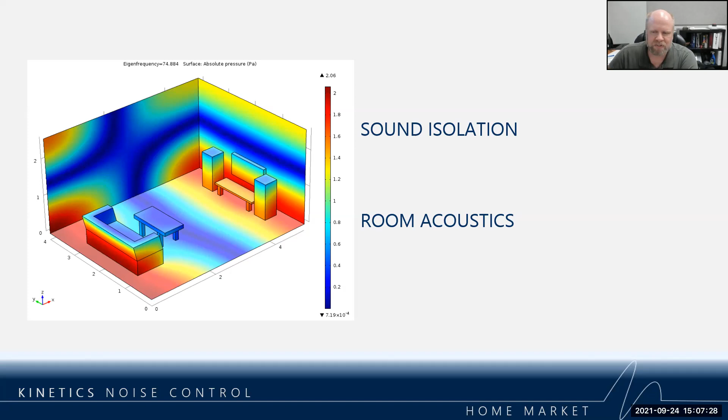As mentioned, this week we're going to try to cover the noise control, the sound isolation side of things. Next week we'll do the room acoustics, the finished goods side of things. Basically the difference is we're talking about building materials, and ultimately on the noise control side of things, something squishy - that's the technical term I'll try to use today. From the room acoustics standpoint, it's either absorption or reflection.

So we'll do a little bit of background information, talk about frequency and sound. You're probably pretty familiar with this - if you look at an oscilloscope and a sound wave, the further it is from that center line, the louder it's going to sound. And the broader the wavelength, the lower the frequency is going to be.

If we look at the spectrum of what we can hear, this full range is there up to about 25 years old. Then what happens is your eardrum starts to actually get a little bit stiffer, and these higher frequencies just don't have enough energy to make your eardrum vibrate. If your eardrum doesn't vibrate, you can't hear it. By the time you're 80 years old, you've kind of lost a lot of that high energy sound.

This is why when you see a lot of the standards, and a lot of things even for home audio, you don't see them concentrating on these higher frequencies, because frankly you can't hear them that well anyway. It's really down here where the bulk of the speakers are going to do their thing. There are super tweeters out there, but they're as much for scientific research as they are actual home theater devices.

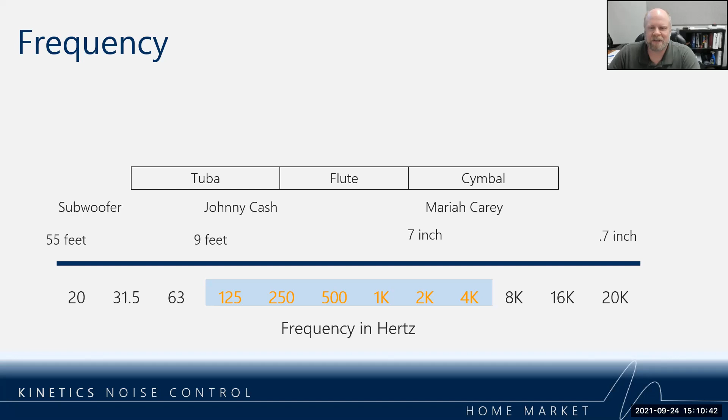So today we're going to talk about sound isolation, and Kinetics has coined the phrase 'retain the experience.' We need that from a marketing perspective. We want to make sure that not only are you paying for that escape, that theater experience, we also don't want the real world coming in and bothering you. It goes both ways, not only bothering the rest of the house, but also bothering your experience. That's what we mean by retain the experience - keep it inside the theater and keep the outside out of the theater.

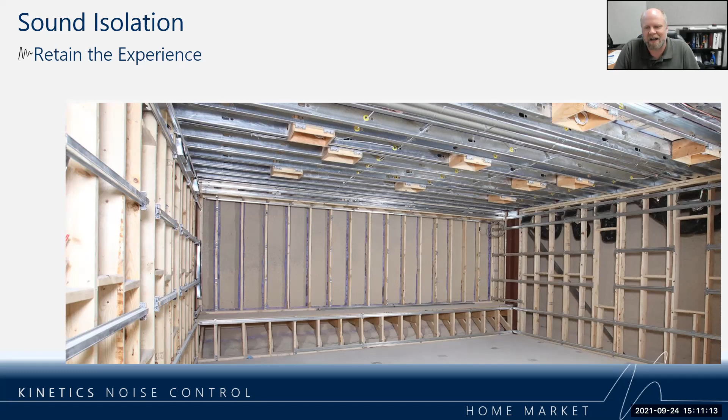If you look at the whole home, what do we mean by all that? Some of these things are going to be what you'd expect, and some maybe not so much. So incoming noise, obviously someone dragging a chair across the floor, that's pretty obvious. Someone flushes a commode, that's going to bother the experience a bit. HVAC noise might not be something you'd think of off the top. And even traffic vibration, truck and traffic, even train vibration can come in and bother you while you're listening.

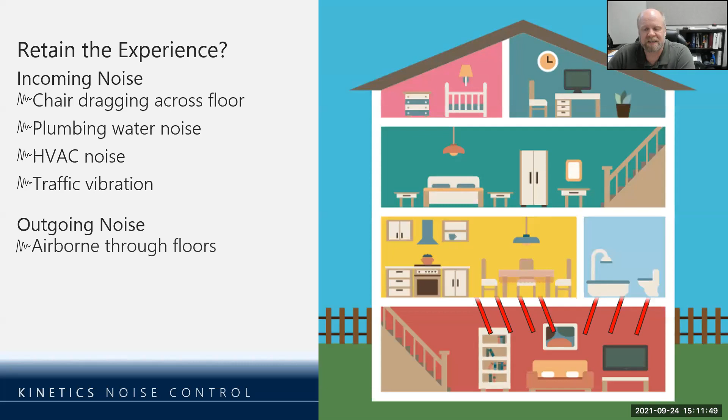At the same time, you've got noise obviously going to go through the ceiling into the floor above. It also can travel through the structure and do funny things, breaking out in funny places - we'll take a look at that. And then one nobody might think about is traveling through ducts. You certainly wouldn't want that R-rated dialogue going into the kids' room late at night.

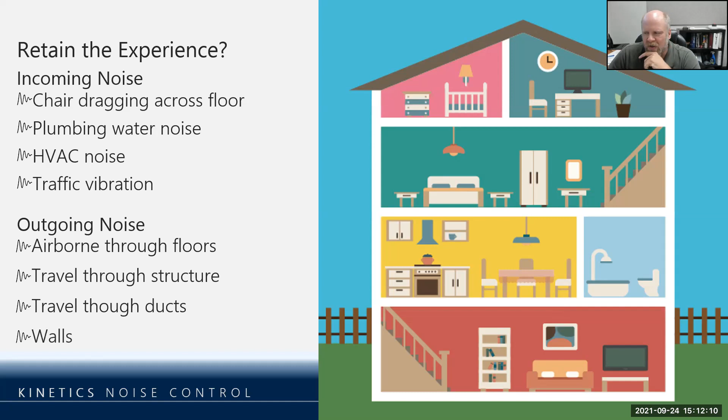Walls are a special case, we'll break those out and talk about those specifically. So the 1, 2, 3 of high performance noise control - there's a couple different ways to cut this cake up, but for high performance, we're going to break it down into 3 things.

The first being mass, and that's just mass of any kind of building material - drywall, concrete, plywood, finished flooring, all that stuff is the mass of the assembly. And basically what happens is sound goes through that mass and becomes less energy on the other side.

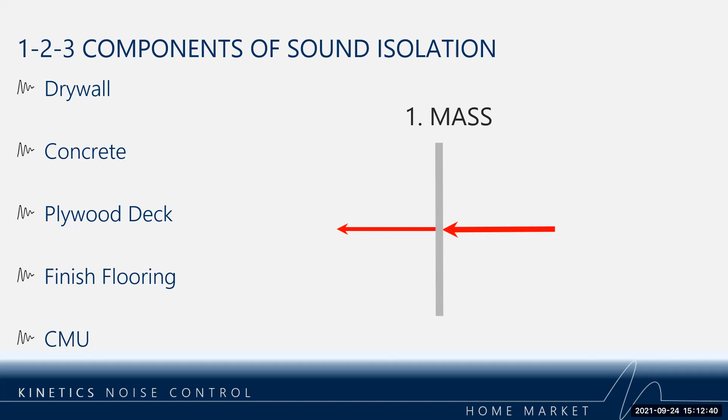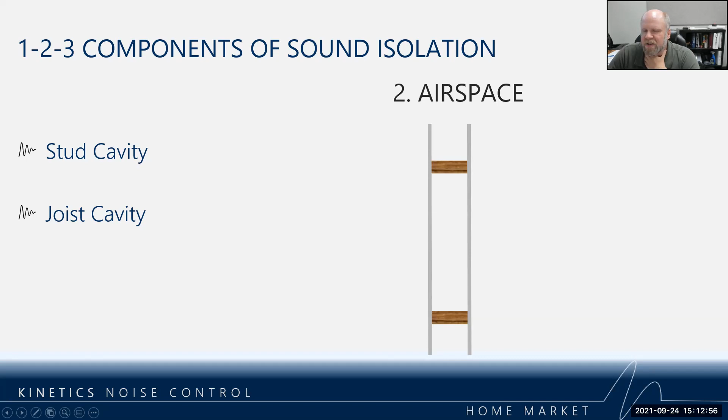The second ingredient is airspace, and people don't understand how important that is. But if we take that mass and split it in half, like over a stud cavity or a joist cavity, we can increase the performance of the noise control beyond the mass by itself. Basically, airborne noise is going to hit that first layer of drywall.

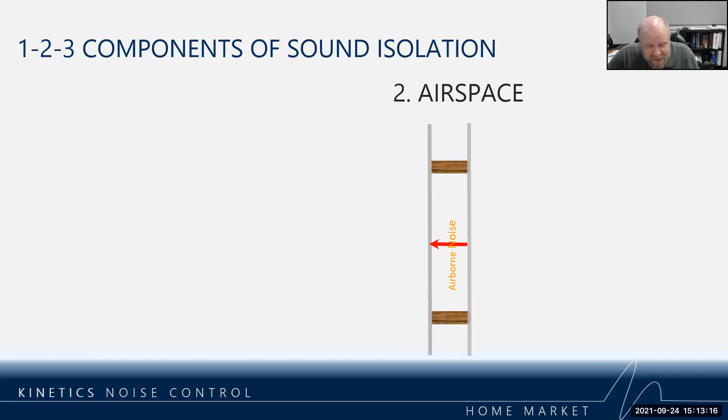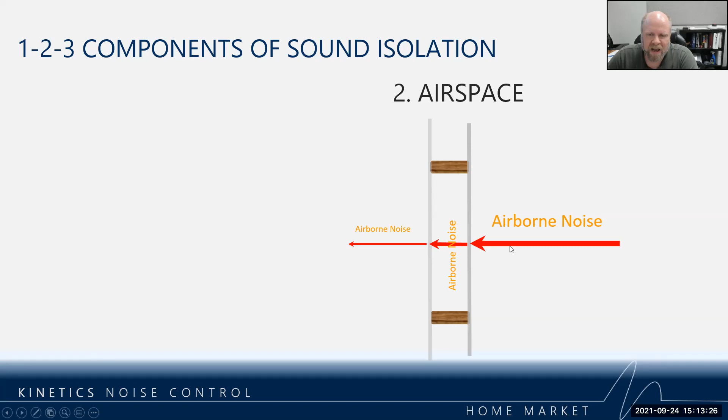It has to become structure-borne vibration to pass through to the other side. If you think about it, if there's a wall between you and me, it has to go from airborne to structure-borne. It's going to break back out as airborne, turn back into structure-borne, and then finally break out on the other side as airborne noise. Having that airspace does do some wonders for how much of that noise breaks through on the other side.

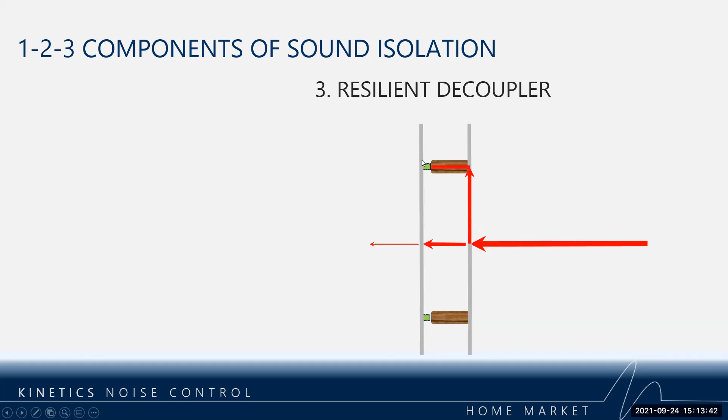The last key ingredient, though, is the resilient decoupler. Basically what we want to do is break the structure-borne vibration on one side with something squishy. Generally speaking, the squishier it is, not only does it work better, but it works to a lower frequency. So for example, a 1-inch spring isolator is going to work better than a 1/2-inch pad isolator.

When we look at the effect of how this mass, airspace, with something squishy in between works with mass, the general rule is that every time you double mass, a barrier will reduce sound by 6 decibels.

So if we look, for example, at a 6-inch concrete slab in a high-rise tower, at 500 hertz, we'll actually knock down 52 decibels of noise. If we double that to 12 inches, it's going to reduce it to 58. If we double it to 24, it will reduce it to 64.

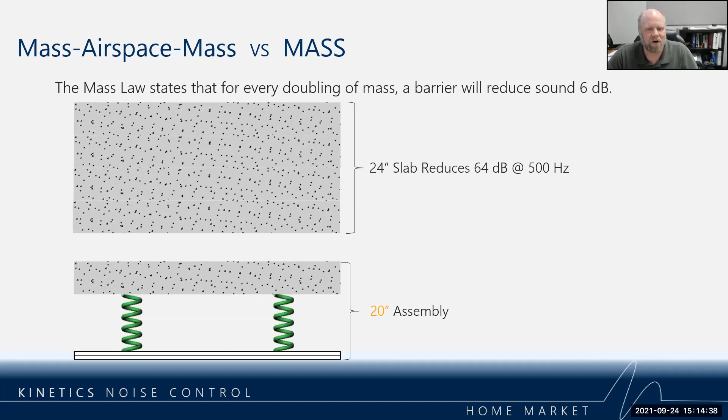But if we go back to that original 6-inch slab and add something isolated with a 1-inch spring hanger and a couple layers of drywall, this 20-inch assembly with much less concrete will actually reduce things 84 decibels. So sometimes when I'm showing off our fancy ceiling hangers with these springs, people think it's overkill. It really is about what you're trying to achieve. But for that money, you can get much, much better performance than just adding mass by itself.

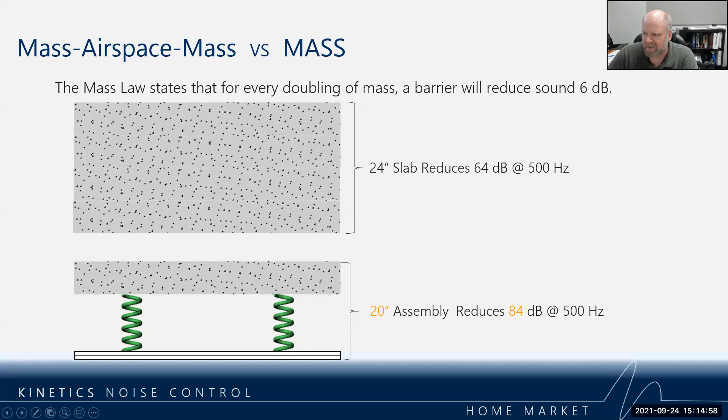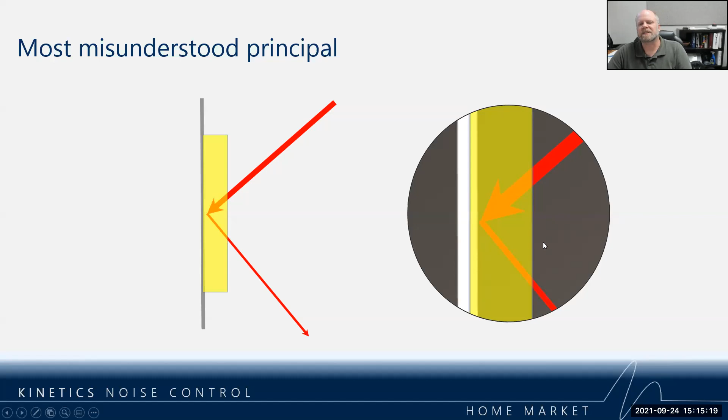The most misunderstood principle is that I'm going to put panels up to block noise. It simply doesn't really do that. What happens when you use an absorber is a lot of the energy happens when it hits that drywall and bounces back, and you get this change in mode, and that's where this energy is being transferred into heat. But that initial wave is going to basically break through that fiberglass, hit the mass, turn into structure-borne vibration, and bounce off. What panels do is basically treat anything that's reverberating inside the space. We'll talk about that more next week.

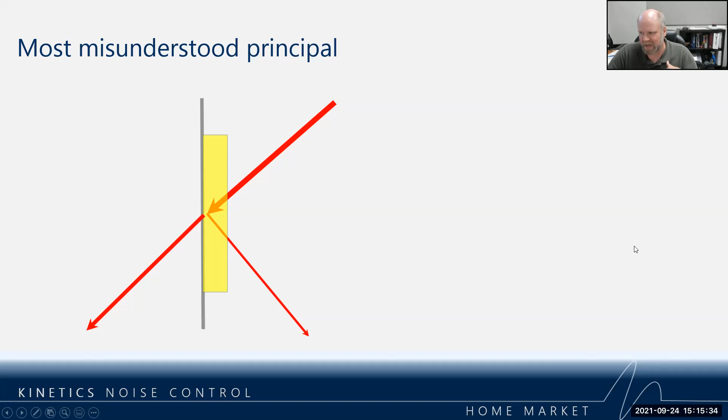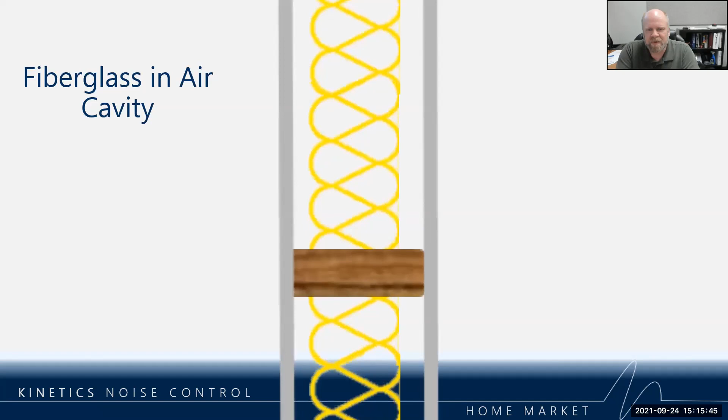That said, putting fiberglass in the air cavity does actually have advantages. If we zoom in on what's happening inside a wall, that sound energy is going to come in, and these loose fibers—you want to use a cheap fiberglass, or up in Canada, mineral wool is much more prevalent, but it's the same idea. You don't want a dense one, just a loose fiber one. Basically it's going to make that sound bounce off those fibers, and every time it's bouncing, it's losing a little bit of energy, and so forth and so on.

If we take these line segments and add them up, we've effectively made it so it takes that sound wave longer to travel through there. So we've effectively increased the airspace. This is why in the car audio world, you put fiberglass inside a bass box when you can't build a box large enough for that speaker, as the specs require. It's because you're basically tricking the air into thinking there's more space in there than it really is. Additionally, the sound is going to radiate off that hard surface and go back and forth and repeat. So that's why putting fiberglass in the cavity does help, where putting fiberglass on a wall does not.

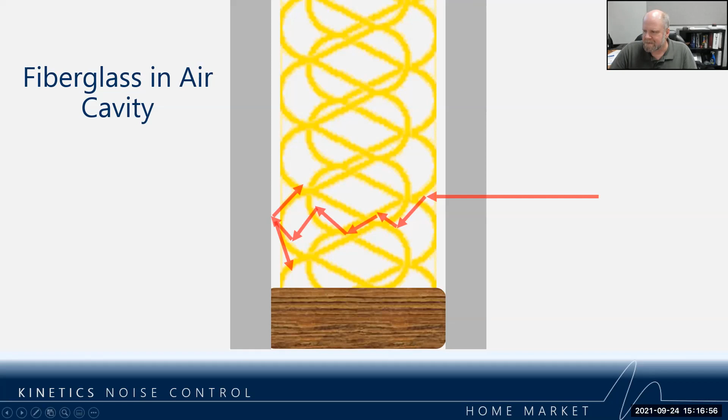Next, we'll look at some sound, and I'm going to have to turn on my audio here, so you can hear it. We're going to look at some background pink noise just as a reference. I trust everyone can hear that—if not, Scott will tell me.

Let's knock it down 3 decibels. 3 dB is about as much as you can hear a difference of. If we do 6, we call that noticeable. 10, because everything's logarithmic, is basically half. At 20, you might even have problems hearing it.

Now this is pink noise, and pink noise by definition is a collection of frequencies, so using the term decibel is appropriate. It's also probably my least favorite acoustic term, because everybody in the world knows what it means, but really when it comes down to it, they don't know what it means. And the reason is because we're way more sensitive to high frequency sounds than we are to low frequency sounds.

That's exactly what this chart is showing you—it's the threshold of what we can hear. Basically, if I played for you something at 2000 hertz, you could hear it at 3 dB, versus at 63 hertz it would have to be 35 dB, and it would sound the same level of loudness to you. A real world example of this: this is why subwoofers need those giant amps, because you've got to get that sound way up to 100 decibels, needing all that power to match the easily obtained power at, say, 2000 and 1000 hertz.

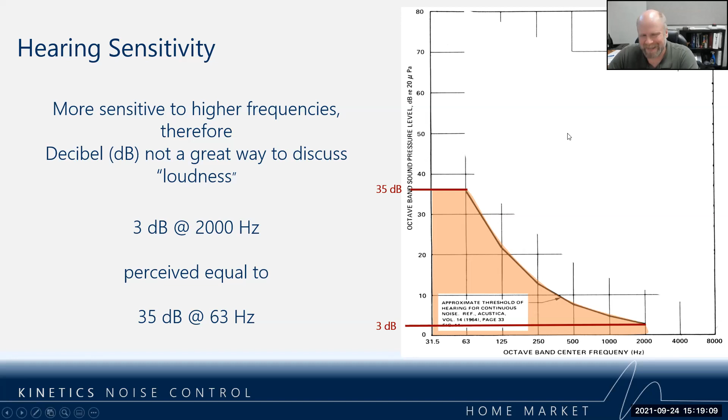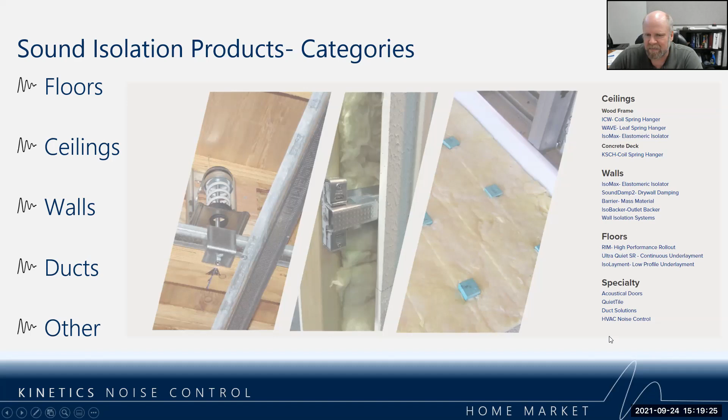Moving on to the products, this is the shot from our webpage on the noise control side of things, all these different products. Basically it breaks down into these categories: floors, ceilings, walls, ducts, and some miscellaneous items. We're going to cover the highlighted ones today. We're not going to try to go through them all.

One thing that makes a lot of sense for the Canadian market is, from a good-better-best standpoint, Watershed brings in our RIM system, which is in the best line. What makes it the best is these pads, which are actually the foundation of our company, create an airspace between the floor below and a new deck above. In this case, they're putting down a sheet of plywood and they're going to pour concrete on it.

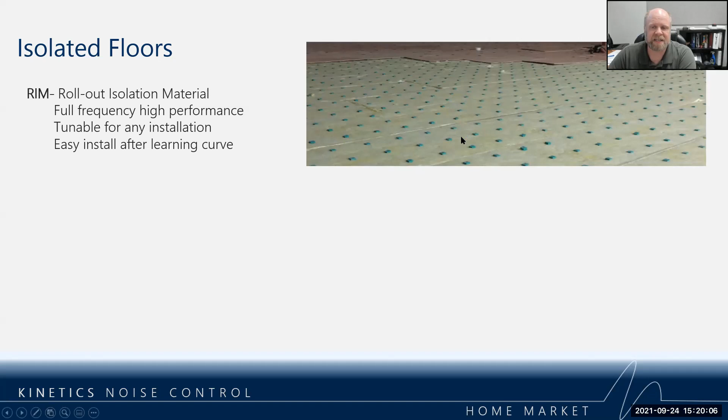What this pad really lets us do, between the type of pad we use and the spacing, is dictate that performance. To go down a rabbit hole without going too far, this shows you something very important about this system: it has a very, very low natural frequency across a long load range. What does that mean to you?

If you use this product even on grade or in the bottom of a basement, it's going to help prevent that subwoofer getting into the structure of the house. It's going to help truck traffic driving by from breaking into the theater, because it isolates very, very low down. The subwoofer cuts off at about 20 hertz; we can isolate down to say 8 hertz if we balance it right. So a very, very good system for floors.

It's the foundation of everything. If you do it right with the pads, you can build the whole system on top of that. It's that room-within-a-room concept, something to keep in mind. We'll look at that in a little bit, but really good. Makes sense to bring that across the border because it ships easier than the other products, which are board products. Between the 1 inch and the 2 inch, we can really dial in that performance to wherever we need to go.

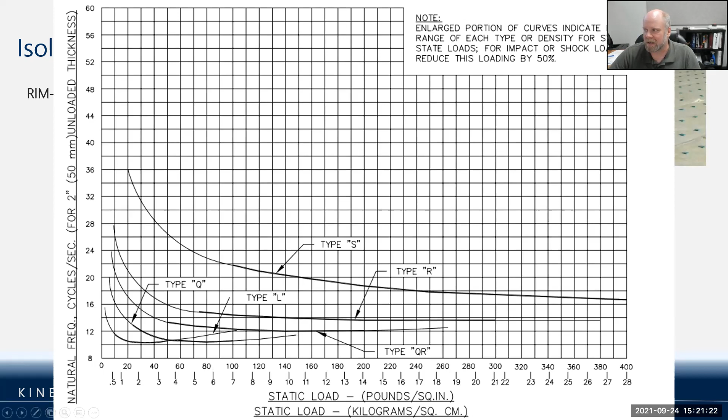That said, with the ceiling, there are a couple different options, keeping in mind that the lower or more squishy it is, the better it's going to perform. Our best one would be a 1 inch deflection spring hanger, our ICW. You see it on a wood joist—think of it like coil shocks on your car. That full 1 inch deflection means it's going to isolate all the way down to 3 hertz.

So it's going to do a really good job not only of capturing the theater sound, but also of preventing high heel noise walking across from breaking into the theater space. It is a higher priced object.

If you need to move the next step down, the wave hanger—if this is a coil shock on your car, this is a leaf spring on your truck. We're looking at a 1 inch deflection versus a 1/2 inch deflection. The performance is pretty good, it does go down to 5 hertz. Doesn't quite attenuate as much as the spring hanger, but there's also a big budget difference.

Last but not least is our Isomax clip as a ceiling isolator. Not the best performance in the world, because the joist creates a big airspace for 12 inches, and this just isn't very, quote unquote, squishy—it's a bit of a rubber pad. Definitely better than nothing, and this works wonders in walls, as we'll see, where you don't have as much airspace.

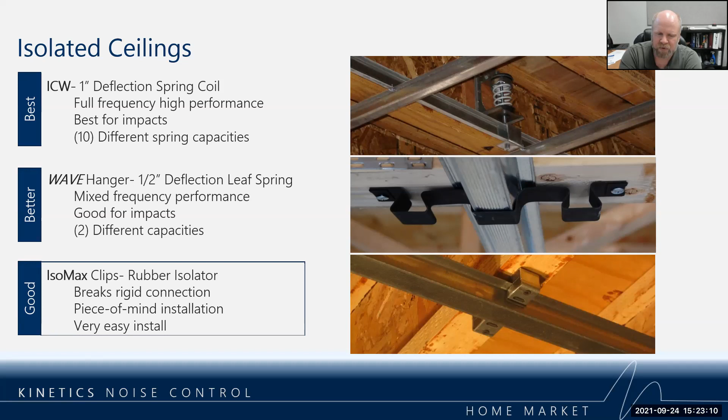Anytime you're building anything isolated, be it a ceiling or a floor, you have to pay attention to some of the tricks of the trade when installing these things. Number one, we're basically trying to isolate, in this case, the drywall with this ceiling hanger.

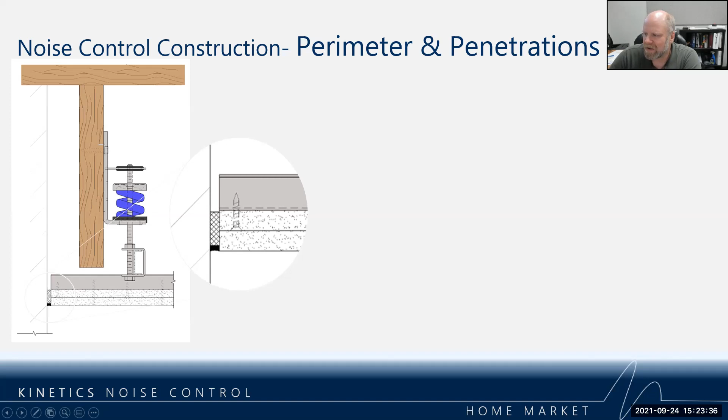We want to make sure that drywall doesn't touch the deck or the sidewalls at all. Here you see what we call a resilient interface going there, and then we finish that off with an acoustic sealant.

Same kind of idea with the floor. You want to make sure if you're isolating the concrete or wood floor that it's not touching the walls, so that thing remains completely isolated.

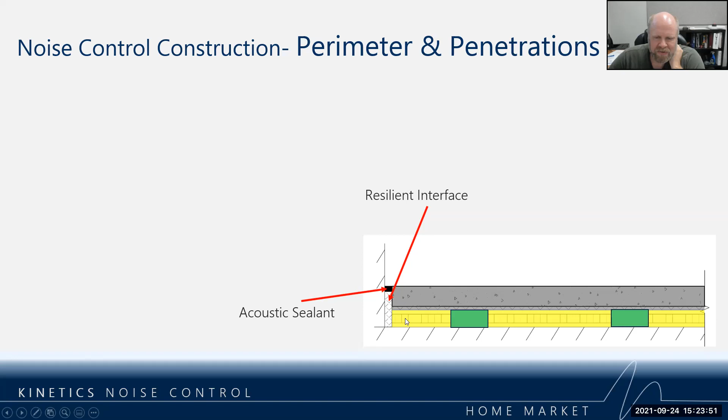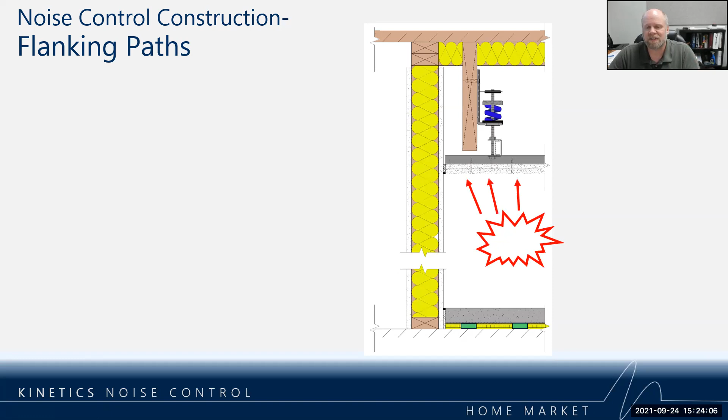Additionally, if you're building a system, you want to make sure the sound cannot flank around these nice systems you're putting in. So in this case, if we have a noise source, the ceiling is doing a good job of preventing that noise, and the wall or floor is doing a good job of preventing that noise, but the sound can get right into that wall and flank around it both top and bottom.

So again, with the rim system, build your wall on top of there and you'll take care of that problem. Then we'll talk about some treatments you can do up here.

Interestingly enough, when you talk about the commercial building code, there is no requirement for treating flanking paths in the United States, but Canada is well ahead of us. In their building code for residential construction, you have to not only use sound abatement treatments, but also control flanking paths as well.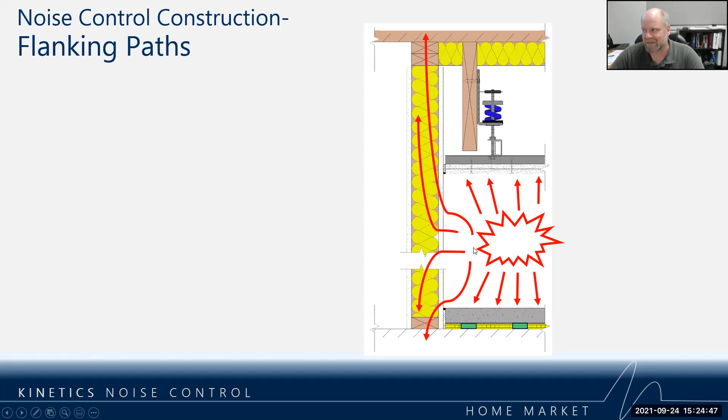So let's take a look at walls and do a scenario with the child that's going off to college, and you want to create a little media room in the basement. You're going to move some furniture around, put a wall in place, and put your isolated ceiling in and your isolated floor in.

And now you've got your noise source. We've treated the top, we've treated the bottom, but we're kind of getting into the walls. So what I'm going to illustrate with a couple different product examples is treating for noise versus treating for structure-borne vibration. Right now we've got a structure-borne vibration path going into the structure here as well as into this wall and breaking out that way.

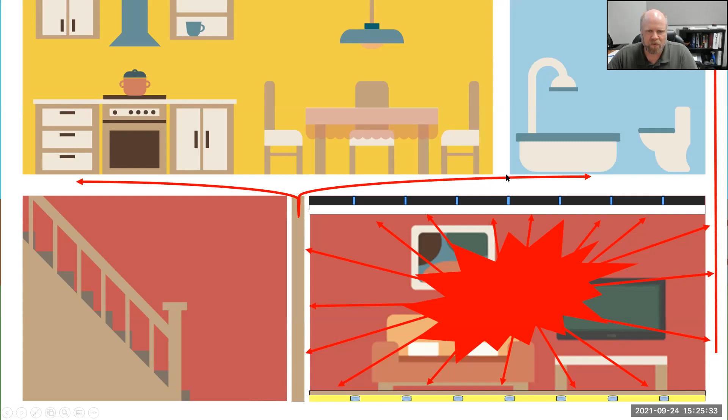So in scenario one, we're going to look at creating a wall right here on the side. We put up what's called a sway brace and build a false wall on top of the floor, making sure it does not have contact up top. When we look at how this performs, we've broken it there.

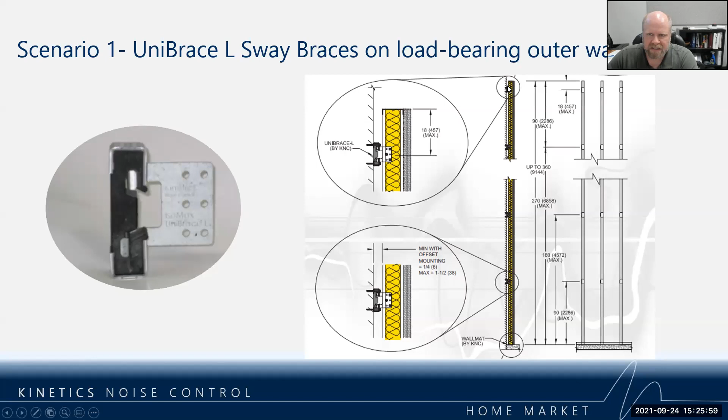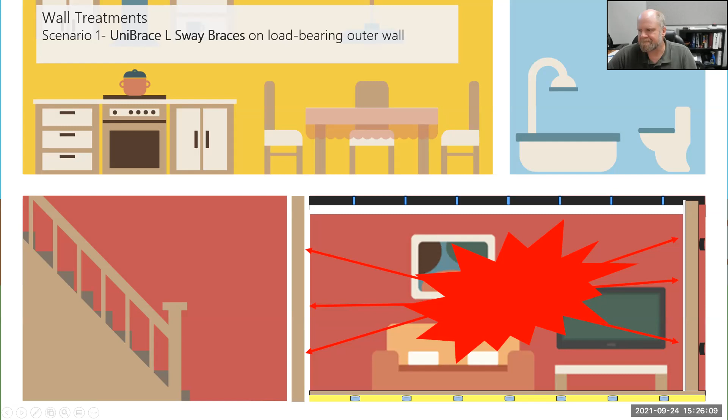This is the particular product. It holds the wall off of it, and you've controlled any vibration from going through to that wall on this side. On the other side, though, we still have this problem, and this is already built.

So what we want to do now is control it top and bottom by making a break there and adding a pad, as well as doing it on the floor and adding a pad on the bottom of the wall. This happens to be our CWCA product, as well as our wall mat.

So basically what we're trying to do is create a break. These products don't make these walls quieter. They just make a transmission path break where that structure-borne vibration can't go from that stud into the structure below or up into the structure above.

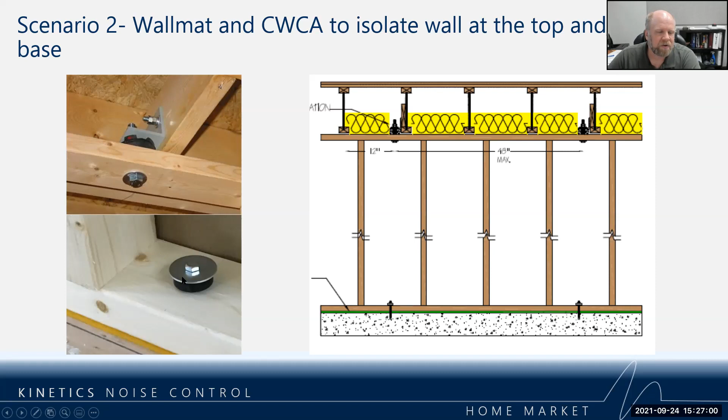And of course, if you're going to have a fastener to fasten your wall down, you better isolate that fastener too, and that's what you're seeing there. That happens to be our KAI isolator. So that's kind of scenario two — we have a stud wall here, and we have an isolated wall here.

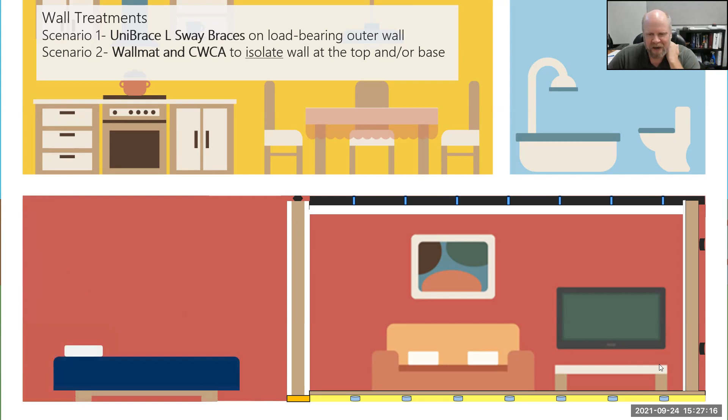Well, of course, the person comes home from college, moves back in, and now we've got a noise problem because we haven't really treated that wall for noise. We've just stopped the noise from going up and down.

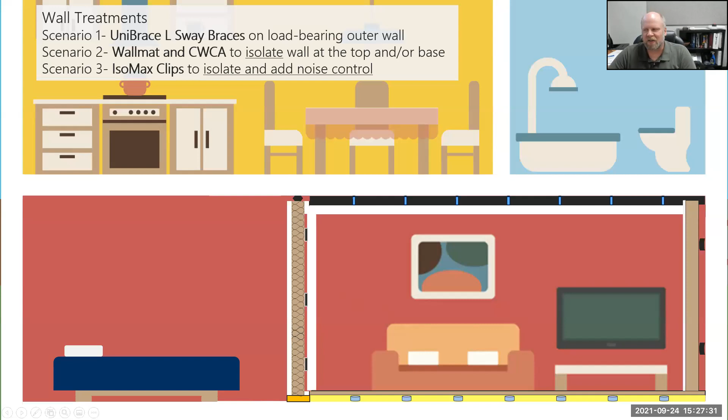In that case, we actually want to isolate the drywall with a product that will do both noise control and vibration control. And here you can see we've completely stopped both the noise and the vibration.

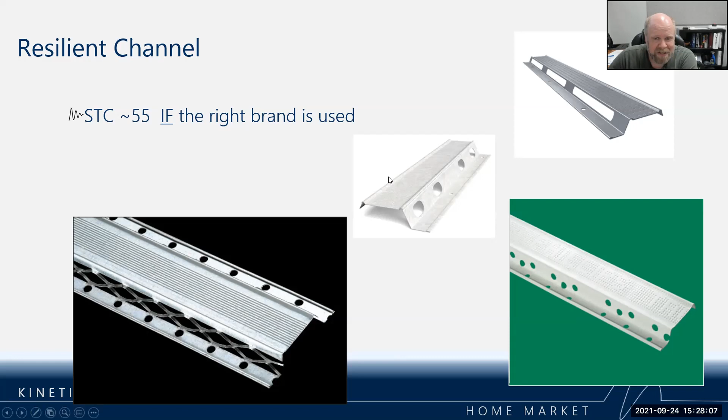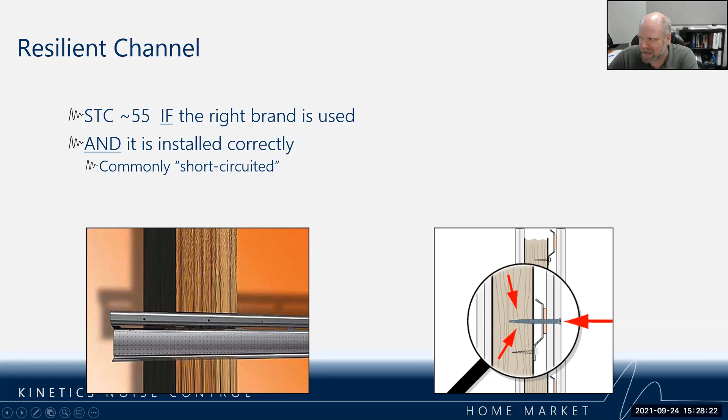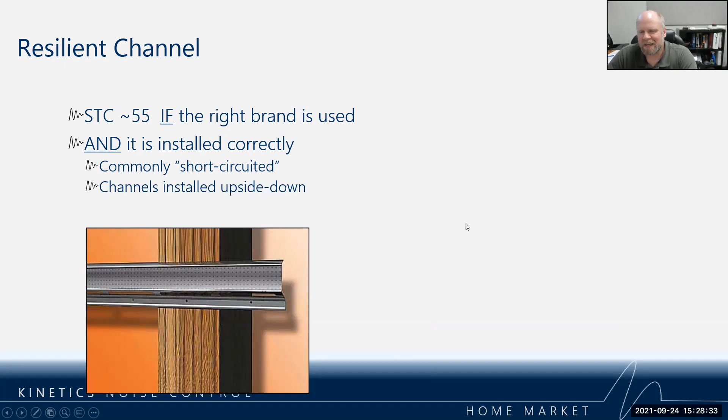Also, you have to make sure you install it correctly. It's really easy to accidentally use the wrong screw and connect the drywall through the resilient channel into a stud. The other problem is half the contractors don't understand it has to fall away from the wall in this case, not push into the wall. They estimate at least 50% of all installations are installed upside down, and it only takes 6 errant screws to make the wall completely worthless.

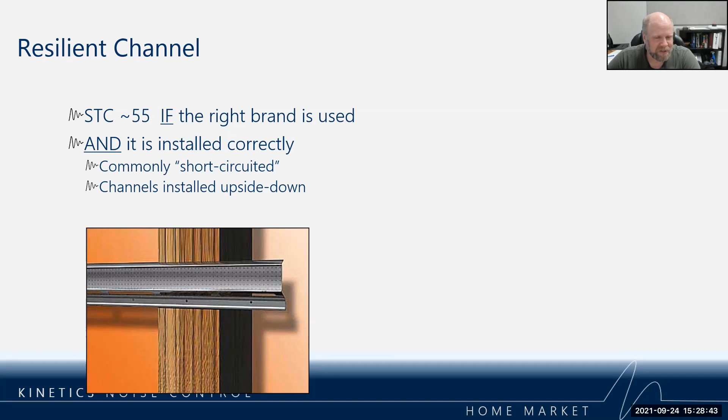That's why a much better product is the IsoMax clip that we looked at for the ceiling. Basically, it gives you the same noise control performance as a double stud wall used between, say, two apartments, in a more compact package. And you cannot mess it up as long as you spec the right screw length.

So it performs better than resilient channel, it's much easier to install, and it's actually less expensive to build this wall than it is this wall. It also saves you 3 inches of space. It does very, very well—dollar for dollar, the best bang for the buck product we have. On the commercial side, if an architect only has 30 seconds to talk to me, I talk about the IsoMax clip.

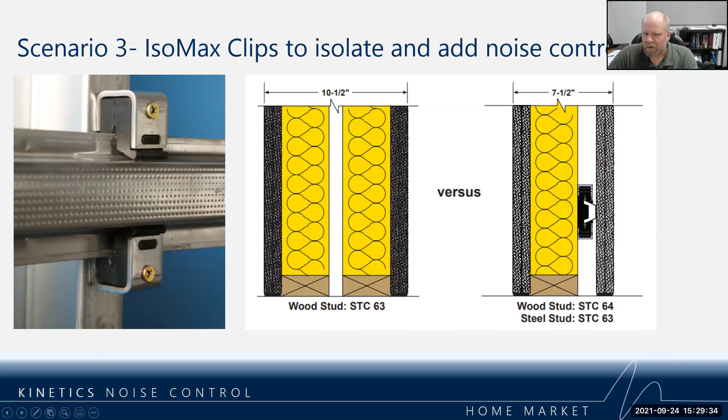We talked about the first most misunderstood principle in noise control being using fiberglass panels to block noise. The second most misunderstood is not understanding how airspace is a function of this.

If we look at a common wall, it has what we call an STC rating—a sound transmission class rating of 33. That's very bad. If I was talking at a normal volume, you would be able to hear everything I say on the other side of that wall.

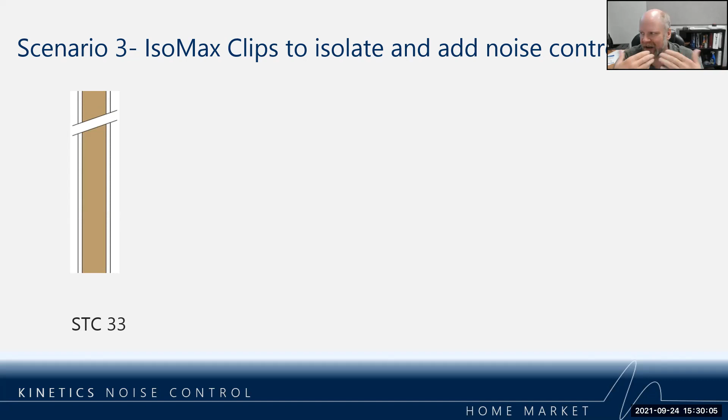If we come up to that existing wall and put an IsoMax clip right on there and add another layer of drywall, we can go from a 33 to a 46, which is a very good improvement with just 3 layers of drywall. However, a 46 is not that good.

If I was talking or yelling on my wall, you would definitely hear it, and if I was playing music, you would hear it. If, however, we use the same ingredients—these 3 layers of drywall—but put an airspace all the way from here to this layer of drywall, we actually get a 61.

So this is kind of my cautionary tale when talking to people about acoustics: if they claim to have a miracle product, they don't. It's always going to be the assembly. It's about mass, it's about airspace, and then it's about squishiness, making sure you understand how that entire assembly works. That's the guide for high performance noise control.

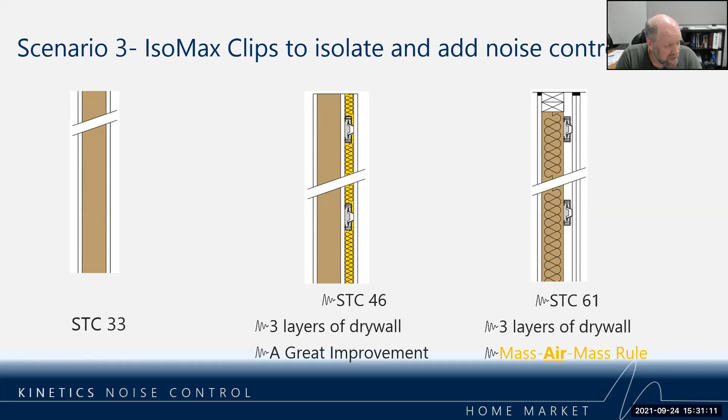You may have heard of products on the market like Green Glue. We offer a version called Sound Amp 2 of the same thing. This product works very differently than the mass-airspace-mass approach. What it does is shift the natural frequency of the wall materials. My best way to explain that is if you ring a dinner bell and then put your finger on the bell, it goes clunk instead of ding. That's kind of what this damping material is doing—shifting it to where we're not as sensitive to it because it's a lower frequency.

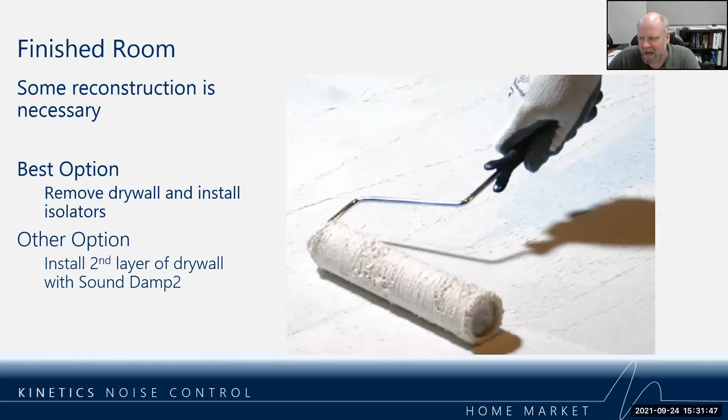It can work. However, what people don't understand is your studs have to be spaced at 24 inches on center—they can't be at 16. And that's usually a downside, because obviously 16 inches is much more common than 24.

You need the mass of those layers of drywall between those studs for it to work. So if someone calls me up and finds this product and asks if they should use it instead of a clip, I'll ask them if it's 16 or 24 inches on center. If they say 16, I say just put another layer of drywall up. If they say 24, I say definitely use the damping compound. It will make a difference.

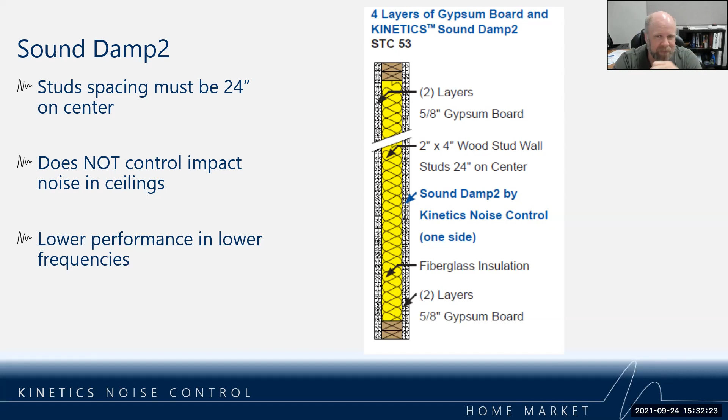So kind of bringing it together, with a room within a room you want to make sure there's no hard connections. It is all about planning. I know that can be a challenge in the home theater world because a lot of times some of these things will already be built.

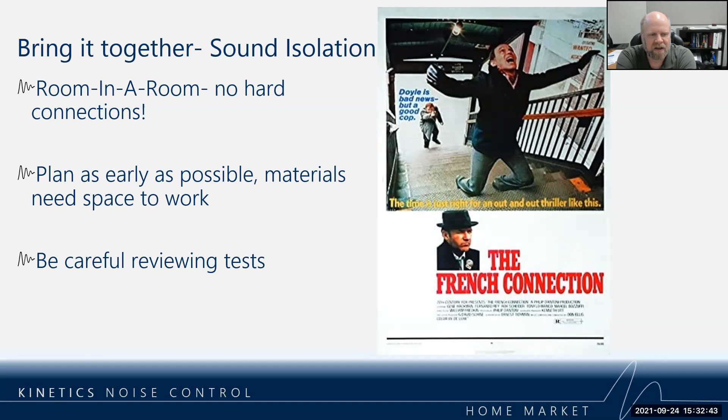So obviously the better you can get in there early, the better it's going to be. Let's take a look - I don't know if anybody's heard of the PAC clip. They compared their version, the RSIC-1 clip, to our version, the wave hanger, and they said they're a point better for airborne noise and a point better for impact noise. But if you break down and look at this construction, you can see how this game is played a little bit. So if we compare their construction versus ours, they used a Pergo system.

We used engineered hardwood floor, so technically we have a bit more mass - this system is probably a little better from a noise control standpoint. They built that flooring on, in our case, a 3 millimeter layer of rubber. They used a 2 millimeter layer of rubber. 3 millimeter should be a little squishier, so far this assembly should actually be better.

However, here's where we used a single layer of 3/4 inch plywood. They used 2 layers of 5/8 inch with a membrane in between. Much more mass, much better system for noise control than just a single layer of 3/4.

The one that really throws people off, though, is the fact that their joist was at 16 inches on center and ours is at 24. That might not make sense from a mass standpoint, but from a stiffness standpoint, this system is much more stiff. So any kind of noise control from an impact standpoint, it's kind of comparing a snare drum versus a bass drum. That snare drum being tight is going to reflect that energy much more than the bass drum. It's a giant advantage to be at 16 versus 24.

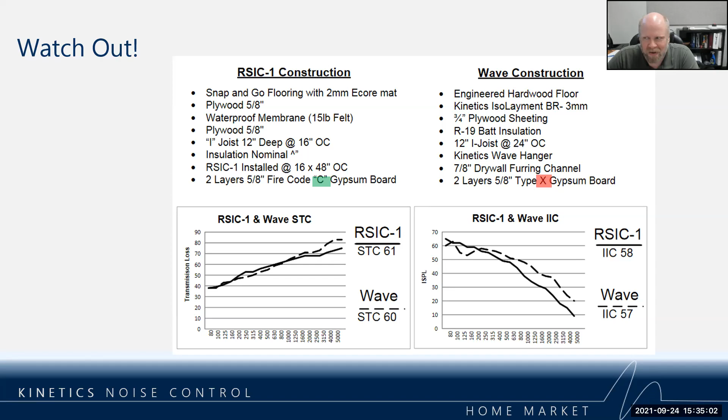So that kind of takes care of floor, ceilings, and walls. We'll look now at ducts. This has been a very much in-demand product for us. We show these things off at CEDIA, it always gets a lot of attention, and then we wind up with a lot of activity afterwards. Unfortunately, I can't do the demo for you, but it is a remarkable demo of how well our products can perform.

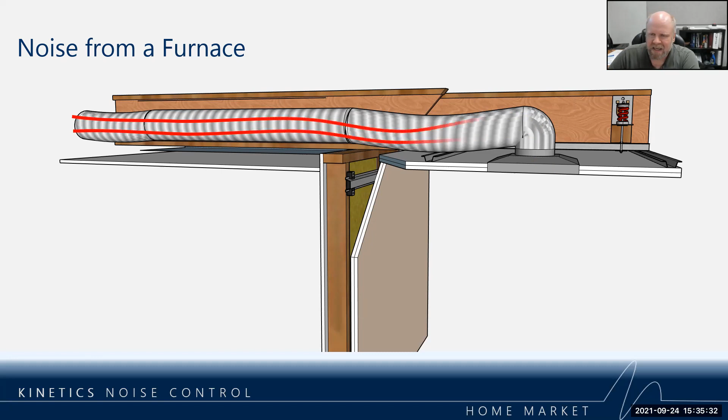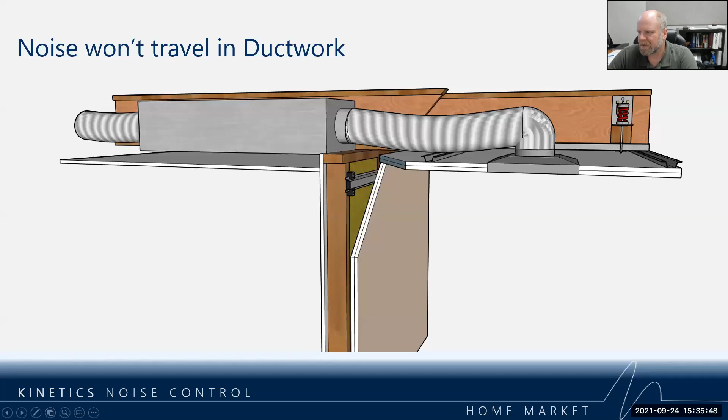In a situation, you have 2 things going on here. One, you have noise from a furnace that's going to break into the room and bother the experience. And then, as mentioned earlier, you might have that rated R soundtrack going out of the theater and breaking out into the rest of the house. And this is where, right outside that theater wall, you want to put in a duct silencer, which will treat both noise going in as well as noise going out quite effectively.

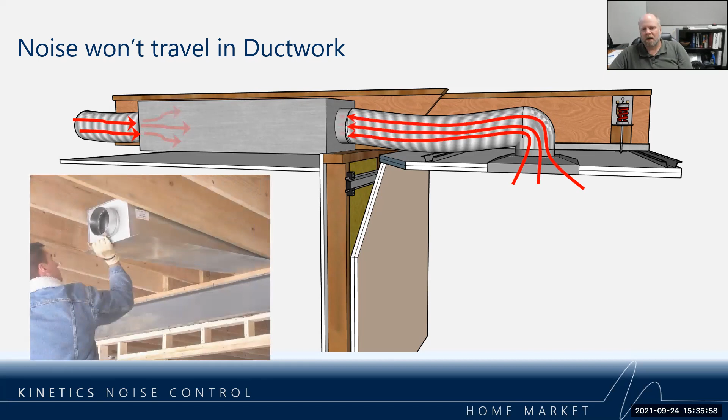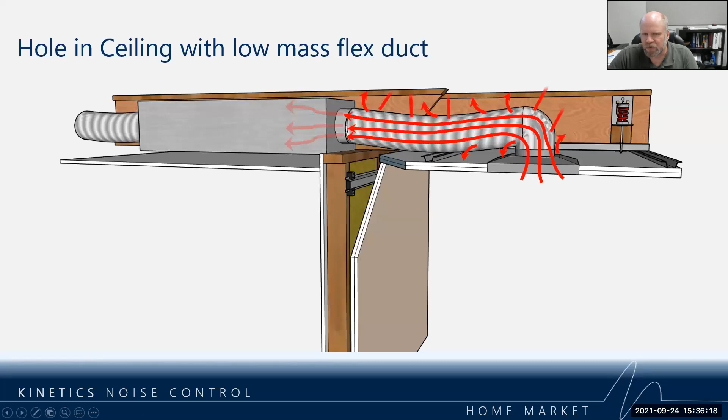The problem in this scenario, though, is you've cut a hole in your mass system for your ceiling, and that sound now goes up and breaks out of this low mass ductwork and gets into the cavity and breaks into the area above. That's where you want to treat it with a mass wrap system - a 1 pound per square foot barrier system. You do want to have a fiberglass pad on top so you prevent direct contact between the duct and the wrap. When you do that, you've now treated that whole space and the sound is completely treated. You've taken care of that hole in the ceiling.

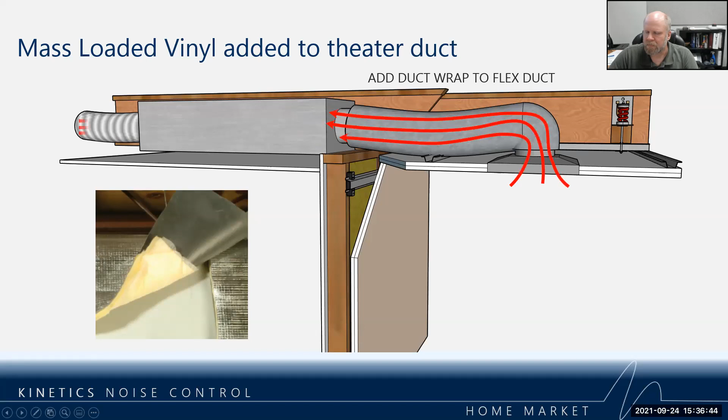Another area is kind of weak links. One, can lights in the system. You're putting a hole in the mass, so you want to replace it with mass speaker boxes or light boxes around that box. You just want to make sure that when you spec a light out, you spec one that can take the heat of being sealed like that. Additionally, anytime you have a light switch or an outlet, you want to make sure you're coating the back of it with that mass, because you've removed that drywall mass from that system.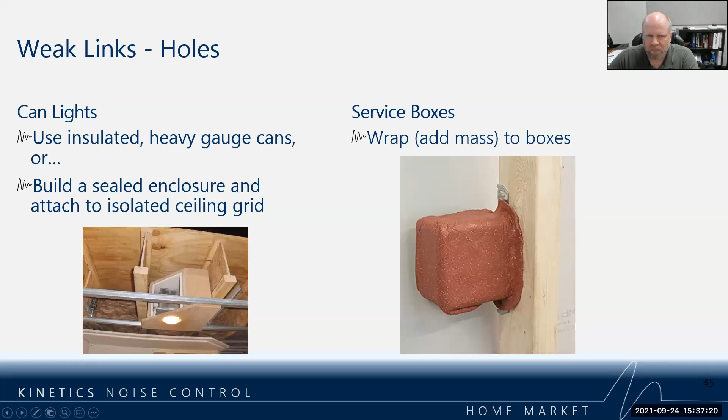Doors - we actually do sell full-size doors, but at the very least, they do make sweeps that when you close the door, they come down and prevent that noise from going under the door frame.

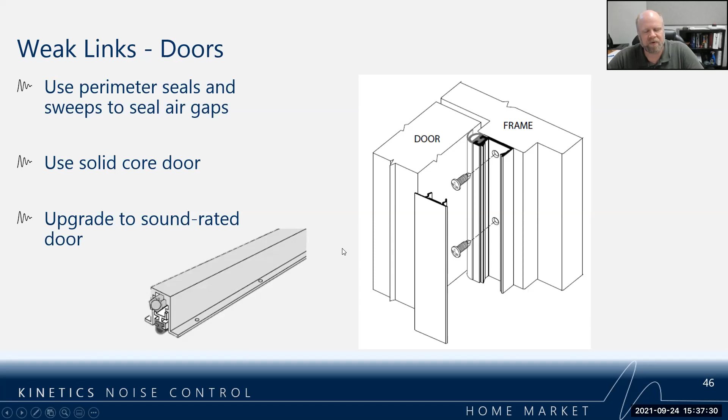Additionally, you guys can sell into any part of the home, and we are a one-stop shop. So things like using our unibraces to isolate garage door openers is definitely available to you.

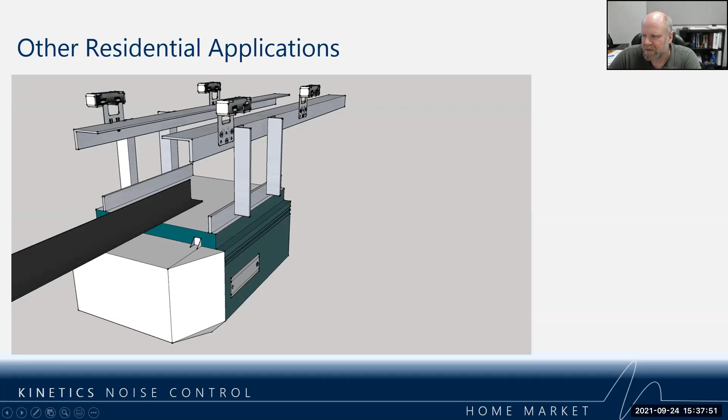Getting into fans and attics, that's definitely a source of structure-borne vibration that not many people think about. The idea is basically, call Watershed, they'll get with us. If it's a wine cellar that's a vibration problem, we've solved that kind of thing. It doesn't have to be anything, just the home theater - we can help with anything. Maybe it's a nursery room when they're building. With the home office craze now, that's something to keep in mind.

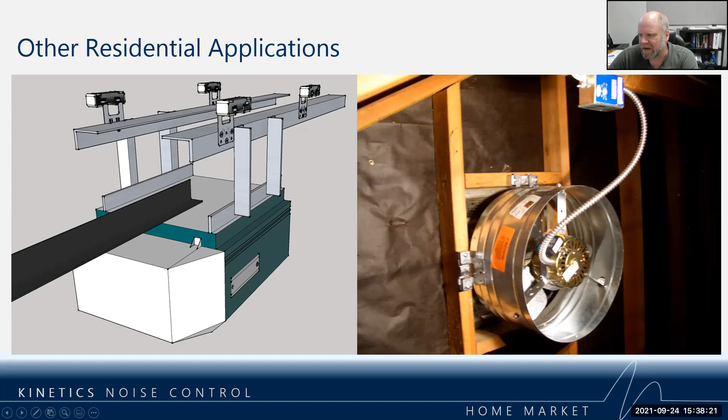And in fact, that's kind of where we begin to wrap everything up here and go back to our main model where we talked about chair dragging and plumbing noise.

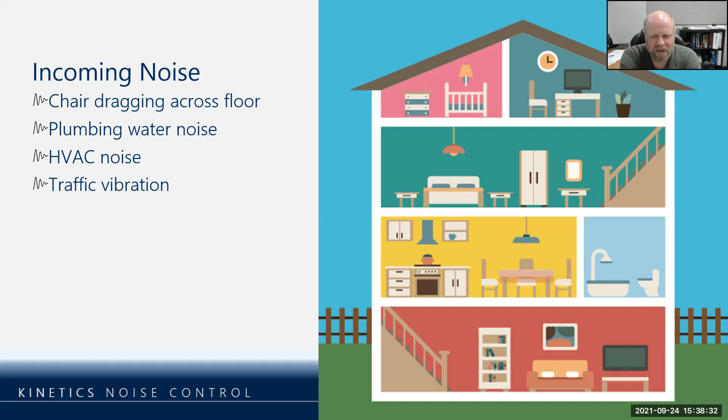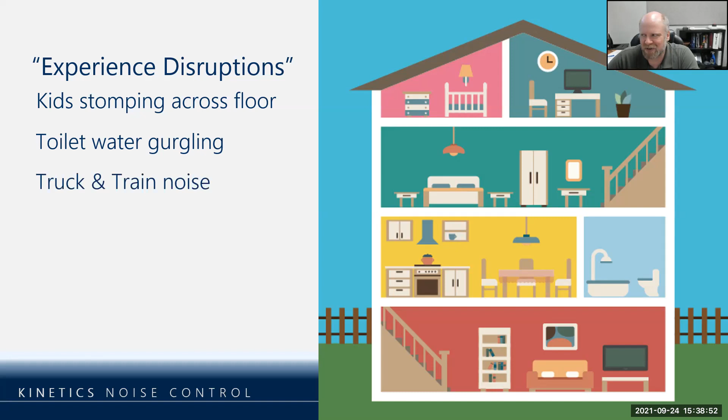Put that marketing spin when you're talking to your clients and say things like, we want to get rid of experience disruptions. Things like kids stomping on a floor, toilet water gurgling - that's a nice descriptive word - truck and train noise. We want to maintain quiet.

This is kind of how I would go about positioning things when talking to a homeowner: if they don't understand why a theater down here might create noise through the floor, if this is something they really can't understand, at that point it's probably better to stop the conversation about noise control and start talking about what we'll cover next week, and that's room acoustics. Because this is really, really basic stuff - I mean, it is going to bother the rest of the house.

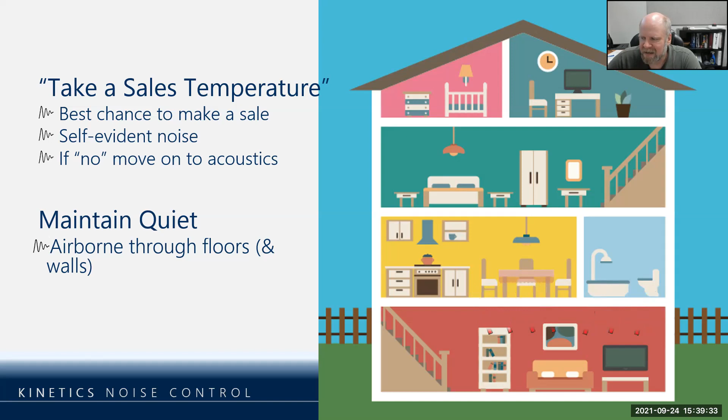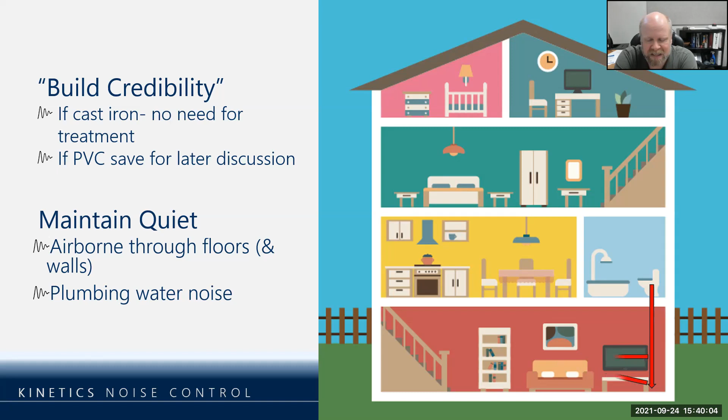If, however, you do get your bite and they understand that, the next thing to ask them about is their piping. Is everything cast iron? You're actually kind of hoping they say yes, because if they say yep, it's cast iron, you can say, oh good, we don't have to worry about that - you've just built yourself some credibility. If they say no, it's PVC, you say, you know what, we'll come back to that, let's talk about some other things. But when you do come back to that same pipe and duct, or that duct wrap we talked about in the previous slide, it's the same kind of treatment you would do for PVC piping.

This is more of a discussion on the finer elements, but you do want to make sure you talk about that subwoofer getting into the structure and breaking out into the rest of the house. The fact that we're now pushed back to home offices makes this conversation a little bit easier. The kids come home from school, they're playing video games, mom is working up in her office and she doesn't want to be bothered - that's a much easier sell than just trying to say we're trying to keep the subwoofer from getting into the structure of the house.

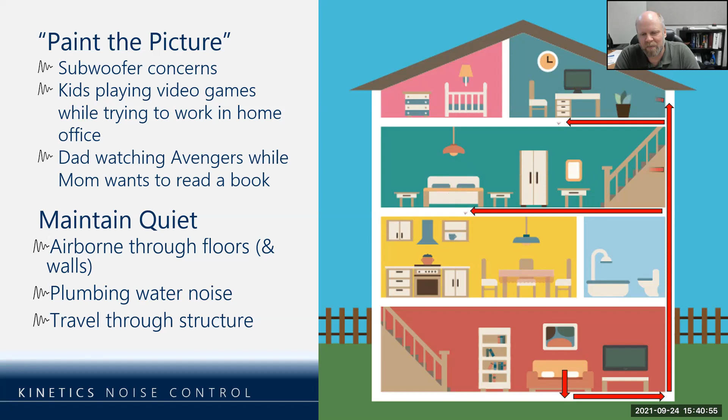Dad wants to watch Avengers, mom wants to read a book - same kind of idea. We're trying to keep that from breaking out. Again, maintaining the experience of the isolated room for both the user as well as the other people in the house.

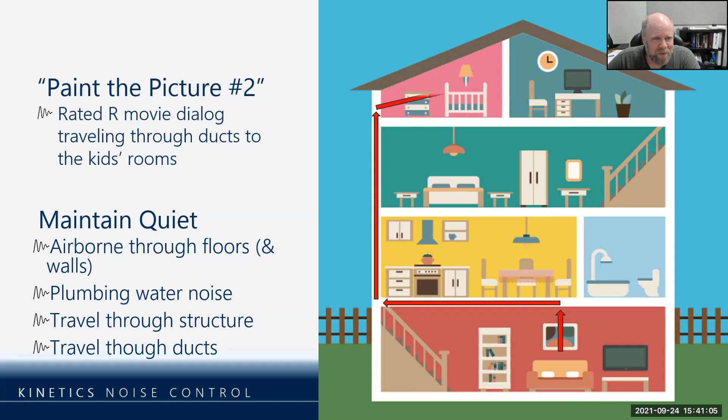And again, traveling through ducts, no one wants that rated R movie getting into the kids' room. So bringing it all together, we want to retain the experience.

My best tips for you are to plan before construction, plan before construction, plan before construction. I've had so many conversations with architects where six months after I've talked to them, they call me back and say, well, we built everything, we're having complaints, what are we gonna do? And I say, well, you've got to tear down your drywall and put something in there. And they're like, what else can we do? I'm like, it's physics. There really isn't much. You've got to stop that structure-borne vibration in that construction somewhere. And how do you do that?

Well, it's basically something squishy. This is where you just reach out to Watershed. They are experts, they'll get with us, they're really, really used to it. They keep a lot of this stuff in stock, and they can talk you through the process of making this happen. One thing I didn't mention is we do offer full engineering support for these things. You're not going to be on your own. You're going to get a full set of drawings on how those things all lay out. We'll take care of all that for you.

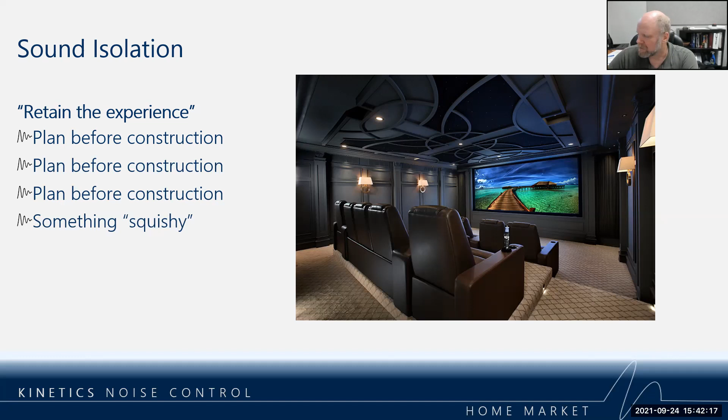So with that, I actually finished three minutes early. Who's got some questions for me?

Jason, that's great. I really like that last part about being for the home office and everything else. This is not just theater product, although that's primarily where we get started with conversations with dealers. But the dealers that have embraced this category for not just theaters are the ones having the most success with it. Everybody needs to pay attention to this because it's a growing category, and it gets you into the jobs and those conversations much sooner, so the dollars aren't being spent elsewhere.

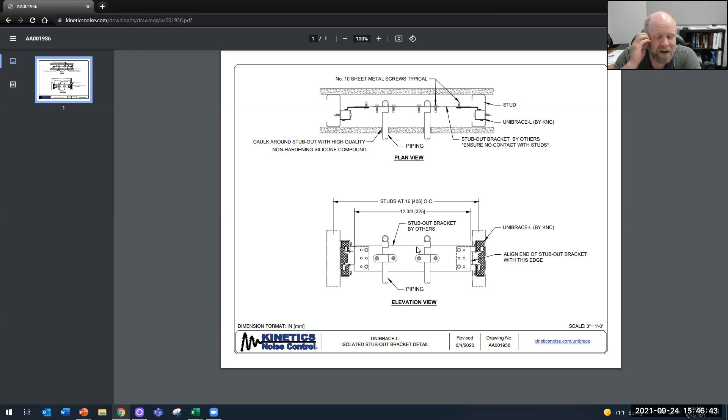That makes sense, all right. You can run that either direction, actually. It's also why you have to be there early to work on these things with the builder or the contractor. Got it.

Quick other question that I just noticed when you're talking about the venting in a room. There's that wrap that goes around the duct or the piping out to the silencer, but in that scenario, when you have that vent in the ceiling, you don't actually wrap the vent itself. You can actually—that makes sense. On the back of it, yes. Okay, that makes sense then.

And I didn't mention it, but if you're ever doing the design, those ribbon diffusers that are long and skinny are much quieter from an airflow standpoint than the square ones. So if you get an opportunity to spec those out, that's the way you want to go.

And on the HVAC thing, if your return can be configured so that you can use a standard silencer, that's great. But if your return air vent is in a stud space and then breaks out into something from there, we can custom make silencers. In fact, we do it quite often, even on the feed. We can custom make silencers that are smaller, larger, longer, whatever for each purpose. But again, getting in there ahead of time before the HVAC goes in is beneficial to you to sell this product.